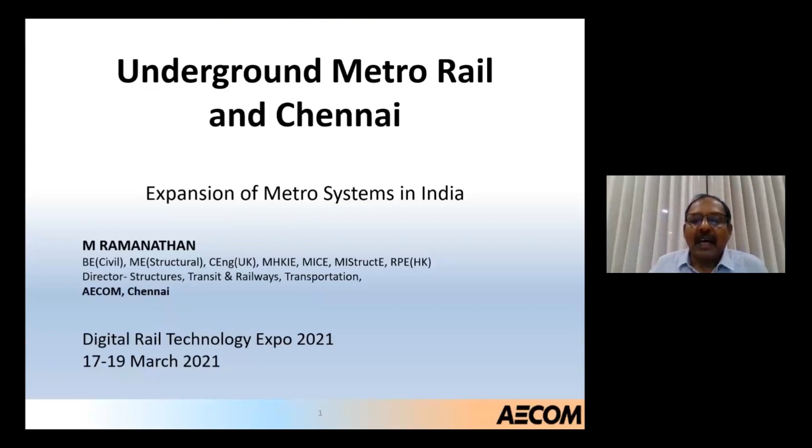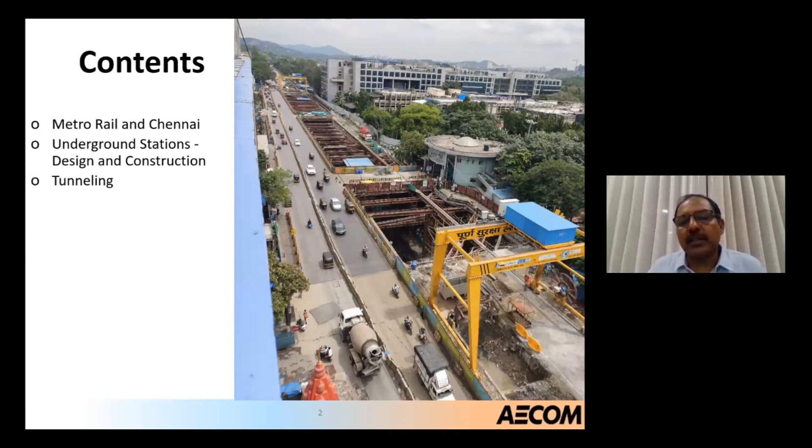So I have divided today's presentation into 3 parts. The first part is about metro rail in general and the city of Chennai and its metro rail. The second part is underground stations, why we should go for underground and what are the merits and demerits. And the third part is tunnels. In underground metros, there are stations at regular distances of 1 kilometer or so, and they are connected by tunnels. So we'll talk something about tunnels as well. And the first part is metro rail and Chennai.

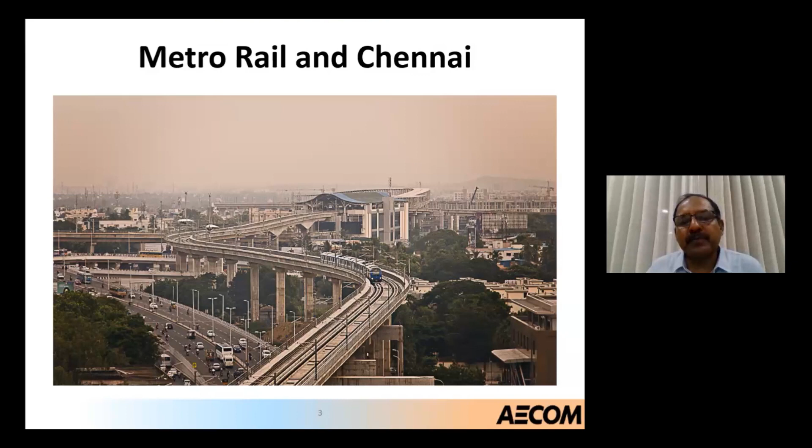Basically, let us go through how metro rail is different from the normal intercity railways, because we have been using the intercity or mainstream railways for very long. But these metros have picked up only in the last 15 to 20 years in this country. So let us just brush up on the basic differences. The metro rail, by name it's clear, runs only in the metro cities, and it's used for mass transit. In Chennai, there are 4-car trains, as you see in this picture.

A 4-car train is capable of transporting 1,276 commuters at a point of time, whereas a bus in this city can take about 70 people, 40 seated and 30 standing. So you can imagine how many buses we would need to replace a single 4-car metro train. So it is used for mass transit. Another thing is the stations are located very close, normally 1 kilometer apart. The idea is anyone along the alignment in the city, by walking not more than 500 meters, should be in a good position to board a train.

That is the idea. And in metro, we use standard gauge. What is the standard gauge? Indian Railways were originally running on meter gauge; as the name indicates, the distance between the two rails is 1 meter, and it is all replaced by broad gauge now, which is more than 1.5 meters. The standard gauge is something between meter gauge and broad gauge. To be precise, it is 1435 millimeters.

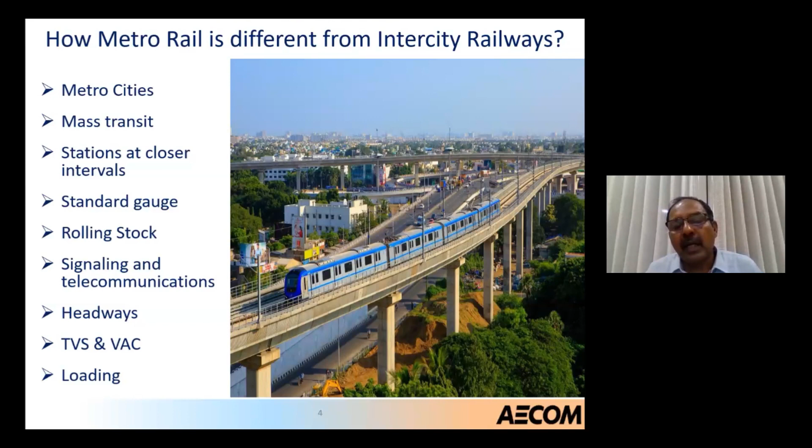And another one is this TVS. What is TVS? Tunnel ventilation system and ventilation and air conditioning system. That is all new and specific for metro rail operations. And the loading of the metro rail trains on the rails is also much different when compared to the broad gauge mainstream railway.

Now, the merits of metro rail. We all generally know that it consumes very less energy, and it is more reliable. There will not be any traffic jams, so it will be punctual, with lesser noise level, and it is very comfortable. Travel in air-conditioned coaches, so the commuter or the passenger will not be subjected to heat and other inconvenience, so that he can go to his workplace in a very good mood.

And the capacity can be augmented. For example, as you see in this picture, this is taken from the Chennai Metro, which comprises 4 cars, but it has been designed for 6 cars. The stations and signaling, telecommunication are all designed for 6 cars. Because these are all designed for a long period, 120 years of design life, it can be augmented to 6 cars whenever it is required. And the journey time is reduced, it's faster, carbon emission is less, and it carries the same traffic as 7 lanes of buses and 22 lanes of private cars. So there's a lot of merits in going for metro rail.

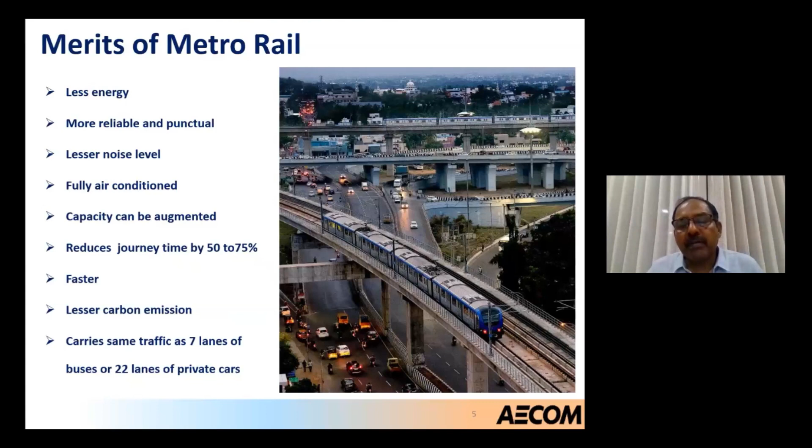So now coming to India. All over the world, metro rail has been very popular, but if you consider India, it all started very late. But actually, the Calcutta Metro started very early, as early as 1972. But the method of construction used was not very modern. It was an underground metro. Nowadays, we have what we call bore tunnels. The tunnels can be bored underground without disturbing the strata above ground. That type of technology had not developed or was not well disseminated.

So the Calcutta Metro used the conventional method, what is called cut and cover. That means you cut open the earth. Now the stations are constructed that way, but tunnels are bored. In Calcutta Metro, they constructed both tunnels and stations by this cut and cover method. And in those days, the communication, the interface between various government agencies and utility companies, was not very good, and all that delayed the Calcutta Metro, and people were subject to a lot of inconvenience. In 1984, after a solid 12 years, they could inaugurate only 3.5 kilometers of underground metro. So the experience of Calcutta Metro made other cities not venture into metro rail.

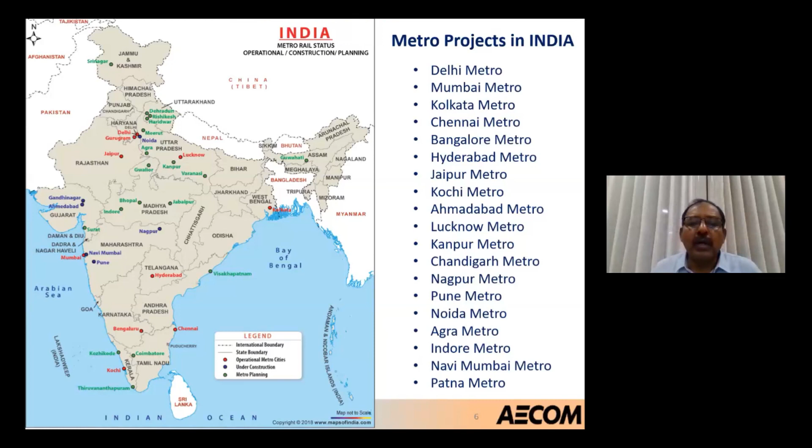So in many second-tier cities, Kochi, Jaipur, Ahmedabad, Lucknow, Kanpur, Chandigarh, Nagpur, Pune, Noida, Agra, Indore, Patna, metro rail constructions are now going on. So the metro system has well taken off in our country. So this is a map of Chennai Metro.

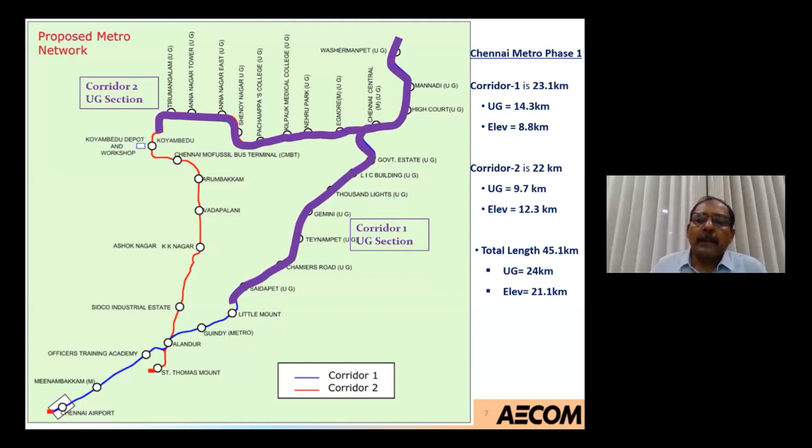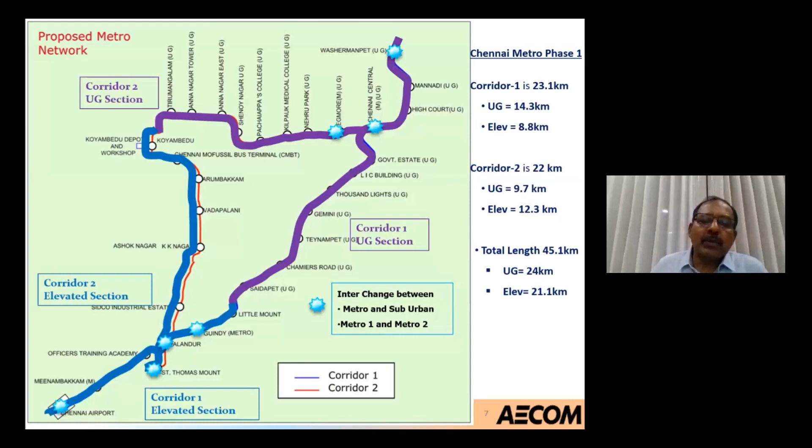I'm going into the details. This is the first phase, which commenced in 2009 and completed in 2016, but in between it's done in phases. This totals 45 kilometers, out of which nearly 50% is underground, shown in the shaded purple color, and the blue color is elevated. So there are two corridors.

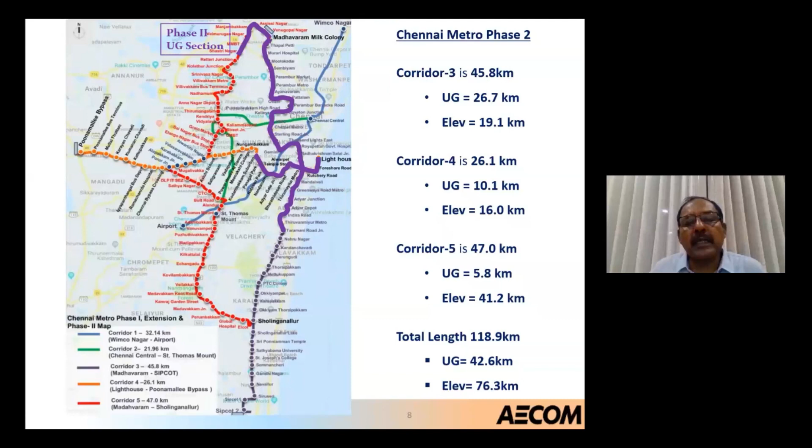So what has been shown in the purple thick color highlighted, one is underground, and the remaining part is... so these are the different stages.

The detailed project report for phase 2 was completed in 2015. The geotechnical investigation, which the client themselves did, was a very expansive geotechnical investigation completed in 2018. The detailed design consultant, AECOM, is doing the entire corridor 3, while other consultants are doing corridor 4 and corridor 5. AECOM is also doing part of corridor 4. These are the detailed design consultants. They were appointed in 2018, and detailed design work was completed in 2019.

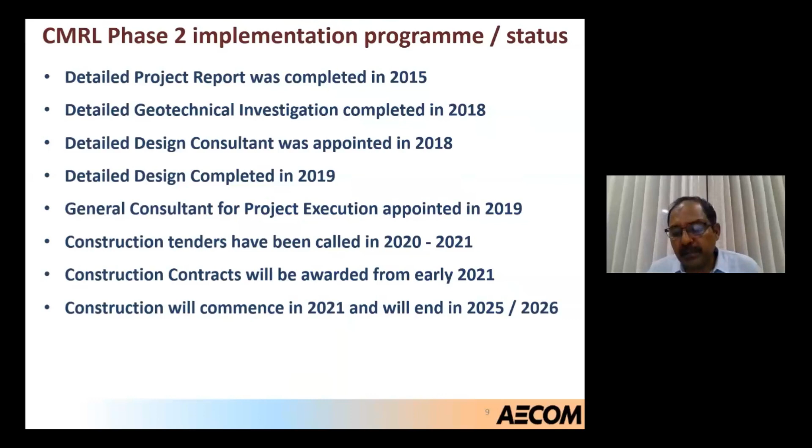A general consultant for project execution, that is construction supervision and contract management, was appointed in 2019. Tenders are floated in 2020 and 2021, and construction contracts will be awarded starting from 2021, with works completed in phases between 2025 and 2026.

Before going to the underground, I want to show a 3D view of an elevated metro along OMR. What is OMR? It is Old Mahabalipuram Road, the road from the city which leads to the historical place called Mahabalipuram, where Prime Minister Modi and Chinese President Xi Jinping met 2 years ago. So this is that road, a famous road of the city called Old Mahabalipuram Road. You can see there is a viaduct below.

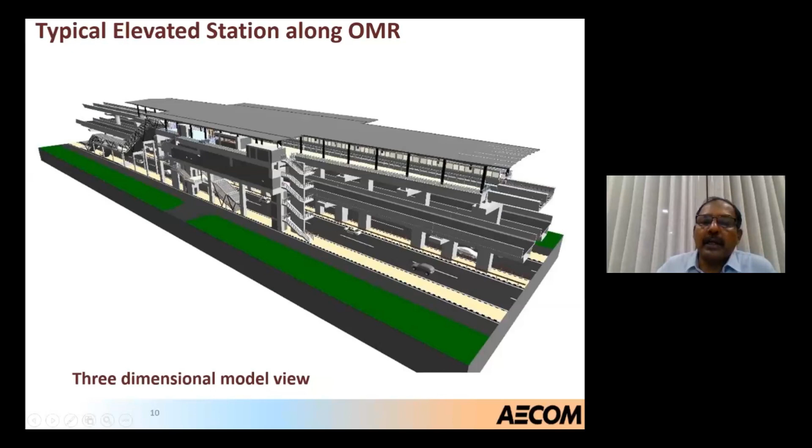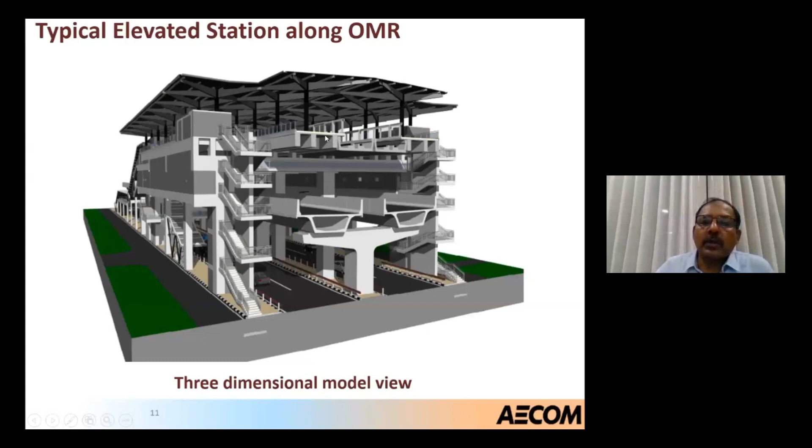This is a proposed elevated road, and the metro rail train will be running above. So this is another cross section, a closer view. This is the existing Old Mahabalipuram Road, now called Rajiv Gandhi Road, and this is the proposed elevated viaduct, and this is the station side platform. The platforms will be opposite to each other.

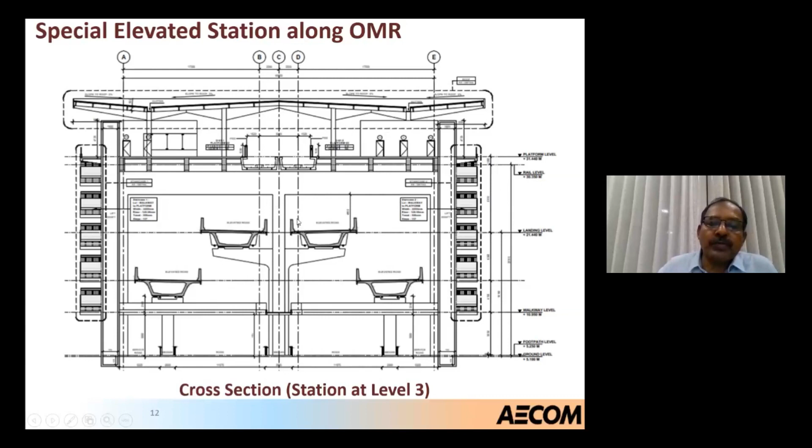And here is another place where there will be 2 decks of elevated viaducts: one elevated road and another at a junction where there is going to be a flyover, over which the stations are constructed. So all provisions - the station will go first, but provisions will be made for the elevated road, which will come later.

And now I go into the underground stations. So this is a typical underground station, where you can see it's a big box, constructed below ground with tunnels on either side.

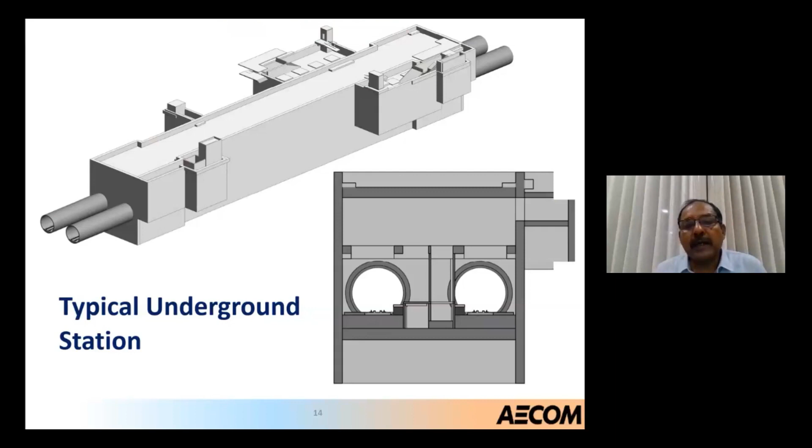Underground metros are there everywhere, all over the world. The London Metro, popularly known as the Tube, is the first one, which started in 1863, and now it has more than 400 kilometers of metro with nearly 270 stations, and on average 40 lakh journeys are performed every day. Paris Metro followed in 1900, New York Metro also in 1904. The US is not very popular for public transport, but the city of New York has this, what is called a subway, which is very popular. It has the maximum number of stations, nearly 472 stations in New York.

And Tokyo Metro came in 1927. Moscow, actually it is a piece of - what I would say - every station has been constructed so meticulously, like a museum, and with a lot of heritage value.

Because of this communist policy and Iron Curtain, many people did not know about the developments in Moscow for a long time. So anybody who has an opportunity should visit Moscow Metro.

Beijing Metro started in 1969, and all over the world, Beijing has the maximum number of people using metro, nearly 1 crore journeys per day. Hong Kong Metro, where I was trained, started operation in 1980, Singapore in 1987. Shanghai Metro, though it started very late in 1993, today has the maximum length of metro rail all over the world, nearly 644 kilometers.

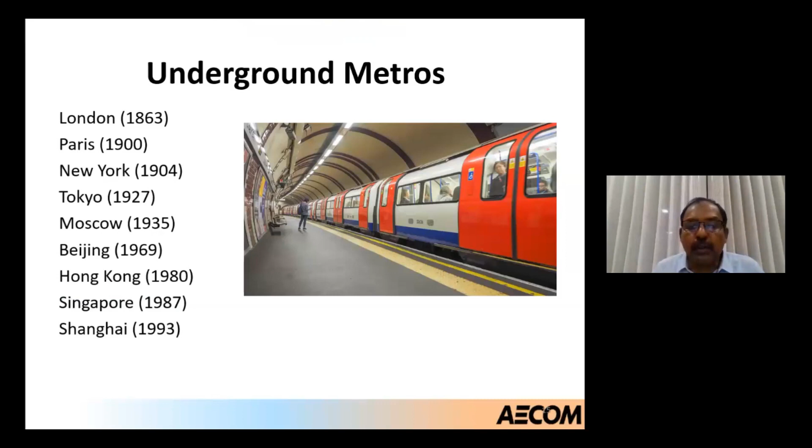Now, all over the world, people use underground metro. Why should they go for underground? As I said before, in India, most of the second tier cities and even the first tier cities go for elevated, for economical reasons. The cost is less, and the inconvenience to city citizens or city dwellers at the time of construction is relatively less in elevated metro. Underground is a bit of a nuisance during construction, it is expensive, and it takes longer time. So that is why our people are mostly going for elevated.

But why do all the major cities all over the world go for underground? Because underground metro is more sustainable. It does not damage the configuration and landscape of the city. I can compare the Mount Road of Madras, or Chennai, and the MG Road of Bangalore. MG Road of Bangalore has an elevated metro, meaning the landscape of the city has totally changed. You have an eyesore sort of viaduct in the middle of a very important road of the city. Whereas in the Anna Salai or Mount Road of Chennai city, which is the lifeline of the city, all the metro stations are below ground, underground.

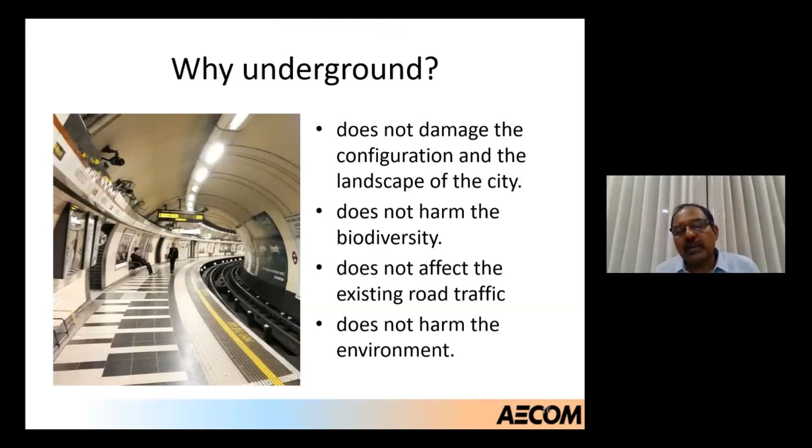It does not harm the biodiversity, and the existing road traffic is not affected, because in elevated metro you build a pier in the middle and the road width is reduced. Whereas underground, whatever traffic we push below the road, otherwise they would have been traveling in buses, cars, or scooters above the road—so all their carbon emission is now saved. So they are going below ground, it is not harming the environment. These are the broad advantages of underground.

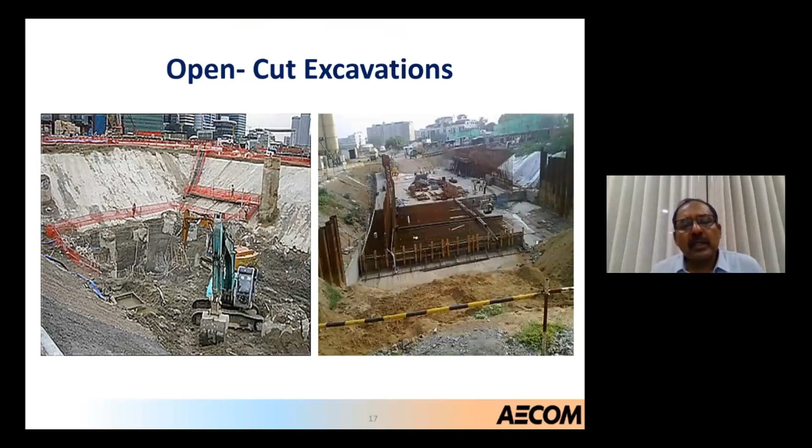Now I quickly go into the construction techniques. Underground, if the soil is good, you can go for open excavation, but not in many places. In places where the soil is loose, you have to use some shoring system or other system. A shoring system is a temporary vertical support to support the excavation. In places like Delhi, in the top portion you don't need any shoring, but below you need it. Mumbai is the same. In places like the Middle East, where the soil is good, you can just go down 25, 30 meters without any problem.

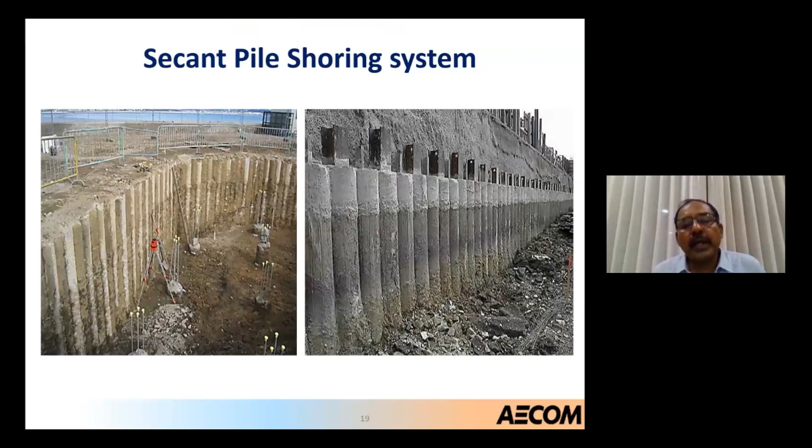But Chennai city is not very advantageous in that way, so we use something called a diaphragm wall, because the water table is very high. It is not economical to use a temporary shoring system. It can be used, but instead, what is used is a diaphragm wall—a concrete wall constructed like a bore pile, by pouring concrete from the top. It is used as temporary support during the construction stage, where you see a lot of steel struts longitudinally and in the transverse direction. But once these are all removed, this diaphragm wall, which was built for temporary use, becomes a permanent support.

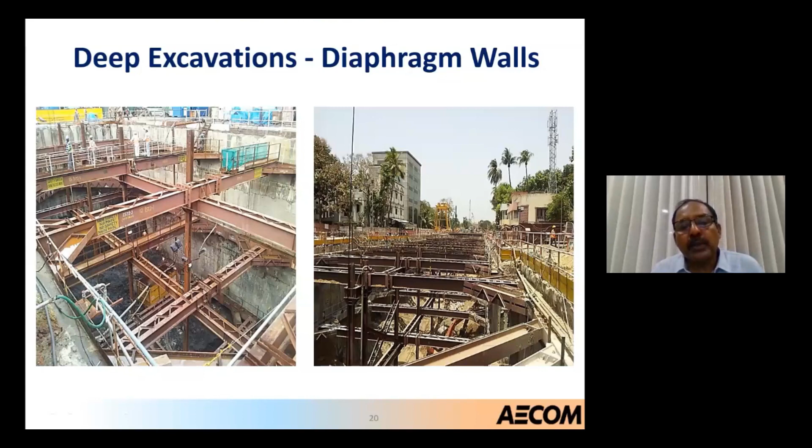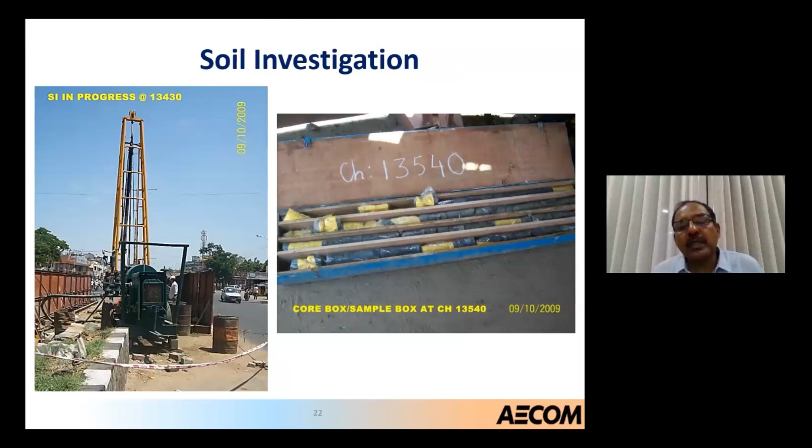This is another view of the diaphragm wall, where you can see the steel struts. We have to do an extensive soil investigation to understand the soil conditions—go 30 meters, 40 meters below ground, take samples, and geologically design your diaphragm wall and the bore tunnels. That is a very important part of underground construction.

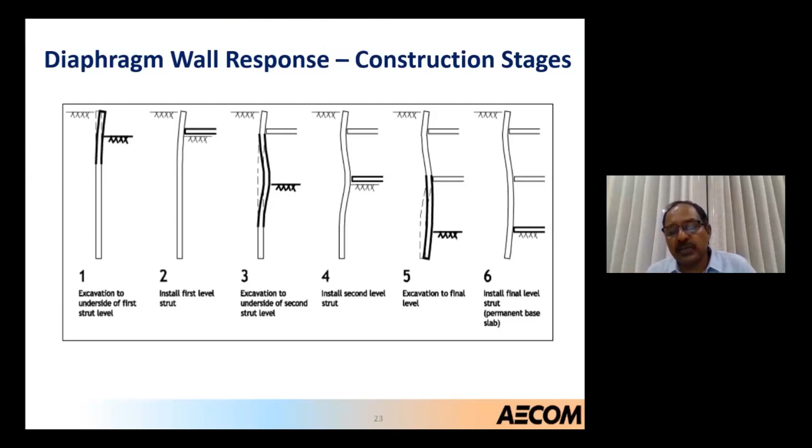As you can see, the performance of this wall at every single stage is not the same, meaning the designer has a big problem. There is no single condition. If you construct a simple building, with walls and slabs and beams, you know the maximum shear force and the maximum bending moment - there is only one case, the maximum load case. But that is not the case with a diaphragm wall or retaining wall, especially in deep underground structures. At every single stage the performance is different, so you have to check every single stage and design such that it withstands all pressures at all stages.

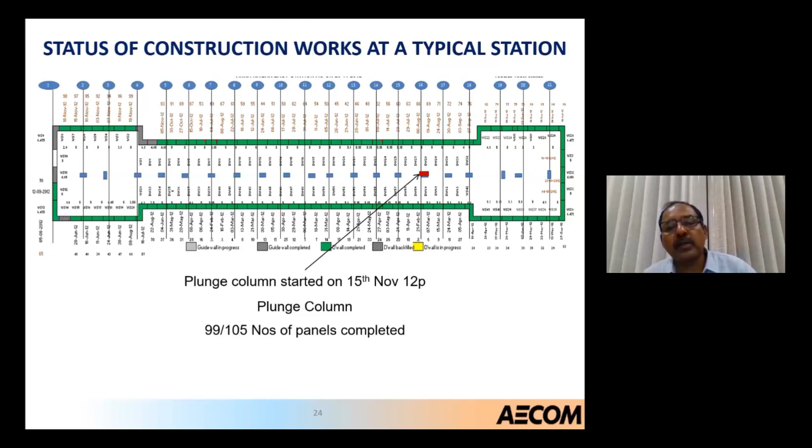This is a plan taken from one of the metro stations in the city of Chennai. What is shown in green color is the diaphragm wall, and what is shown in blue color is a column in between. This is a plan view.

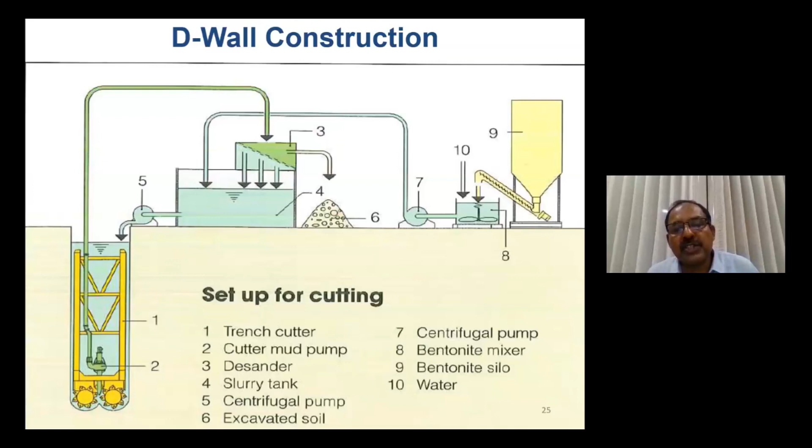This is how the D wall is constructed by diaphragm wall, shown in 1 and 2. I've taken this from a brochure of a trench cutter manufacturer. The trench is cut, and a temporary solution called bentonite is filled in, which holds the excavation temporarily while you insert the rebars or reinforcement and also the concrete. This is a very elaborate process, and not many contractors can do it - you need a lot of equipment and specialization to do this diaphragm wall.

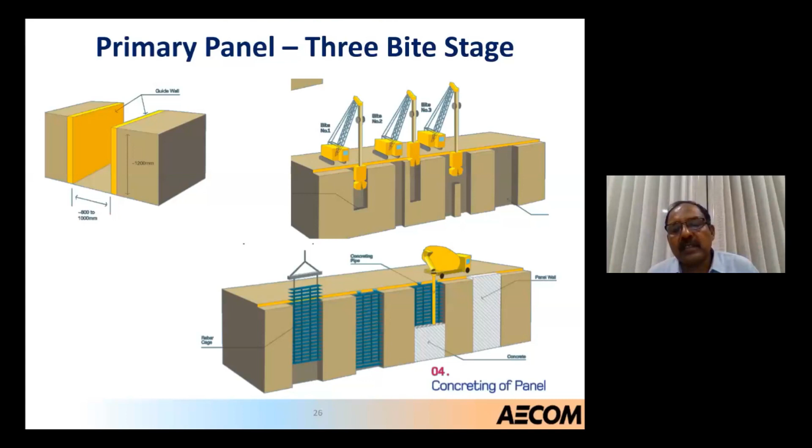These are some more cartoons showing how it's done. It is all cut into small pieces. The first one shows a guide wall, and the second shows it cut in 3 bites, with reinforcement after the 3 bites. You hold for the entire thing, normally about 1.5 to 1.8 meters, and the rebar reinforcement is inserted, and concrete is poured.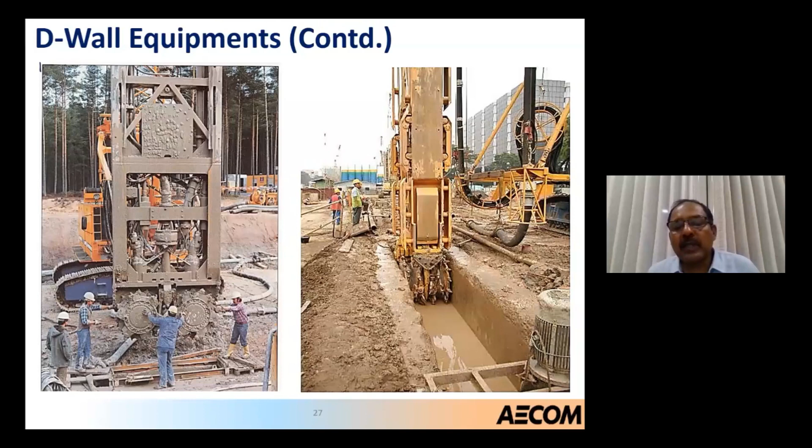So these are the pictures. On the left side is the trench cutter, and on the right side is what I talked about, the guide wall. It's going down, and this is a reinforcement cage of a diaphragm wall. What you see, the planks at 3 levels, is for the 3 stages, 3 slabs - the top slab and the concourse slab where commuters come and buy tickets, and then down to the platform level where the trains are. At all these 3 levels, you have to put the rebars to the couplers for the rebars of the slabs to connect.

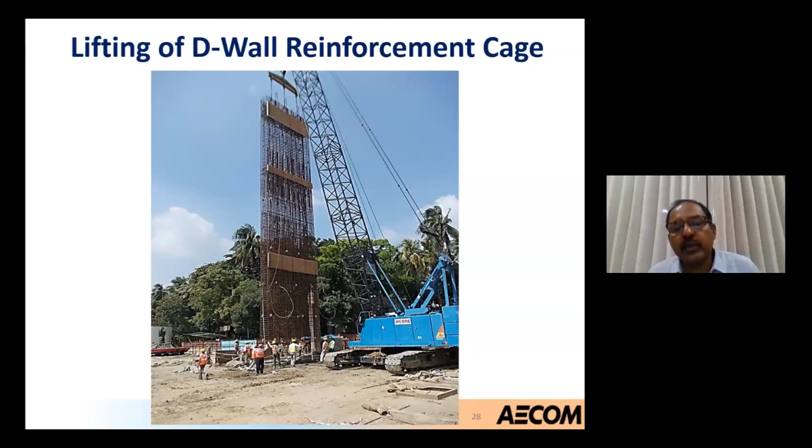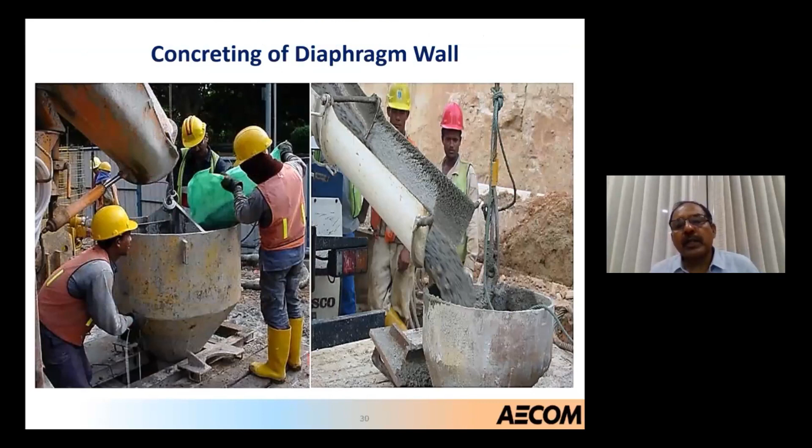This is a close-up view. The reinforcement is pushed in, and this is concreting. This is how a diaphragm wall is constructed, and this photo was taken during construction of the Chennai Central Station, a 4-level station, a very complicated station.

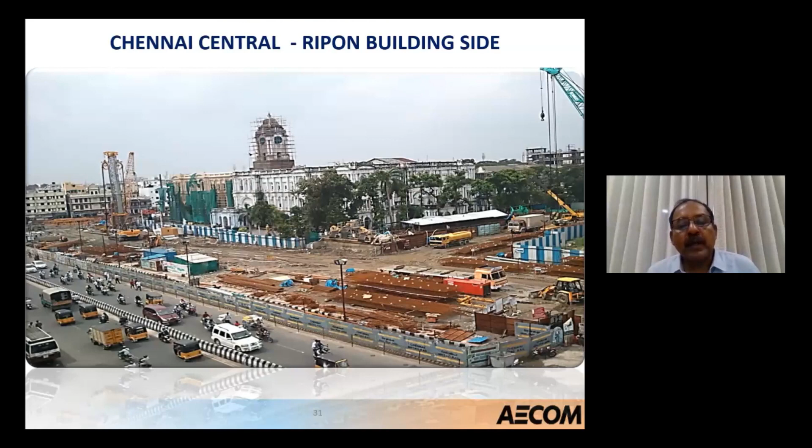I was talking about the heritage building. What you see on the right-hand side in white color is the Ripon building, more than 100 years old. Some renovation work was also going on at the same time. You can see all the reinforcement bars left out, and the traffic has been diverted - part of the road has been taken by the contractor for construction, while the remaining part continues with traffic. This is what I call the disturbance or nuisance to the public during construction. There's a lot of utilities to be diverted, a lot of traffic to be diverted. But once you construct it, the station will go below ground and it will last for 120 years.

This is another underground station, also from Chennai. I don't want to go into the details, but this is what you call top-down construction. The diaphragm wall, and then the struts - you can see the reinforcement. The slab will be cast first, the top slab, and then excavation will go further down.

So first slab will be cast first, second slab next, and the third slab later. It is called top-down. There is also another method called bottom-up: we excavate everything down and build from the bottom.

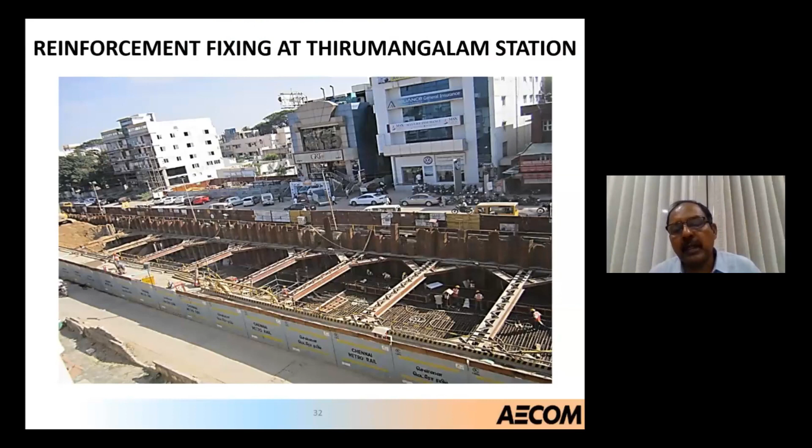So very quickly, I'll go through the bore tunnels. The bore tunnels are tunnels which are connecting the two stations. So normally, these twin tunnels are 14 meters apart and average 6-meter diameter. To be precise, it may be 5.8 or 5.7, something like that. It was a big thing when it started in 2000, but now after 20 years, Indian contractors and Indian engineers are very familiar with bore tunnels.

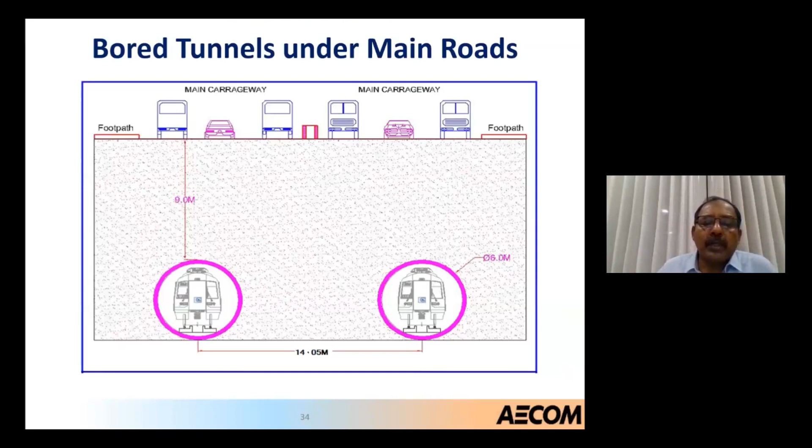It is normally 1.5 times the diameter, that's 9 meter, 6 times 1.5 below ground. But if situation warrants, it can also be above, but you have to treat the ground. So this is a tunnel which is showing what we call technically space proofing. That is, everything will fit into it, and the train should not touch the kinematic envelope what you see all around, and all the cables, ducts, drainage, rail support things, platforms, everything will be accommodated within this 5.8 meter or 6-meter diameter tunnel.

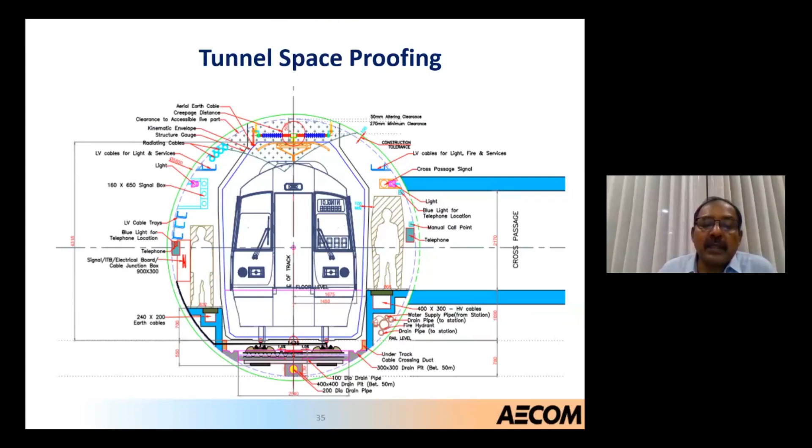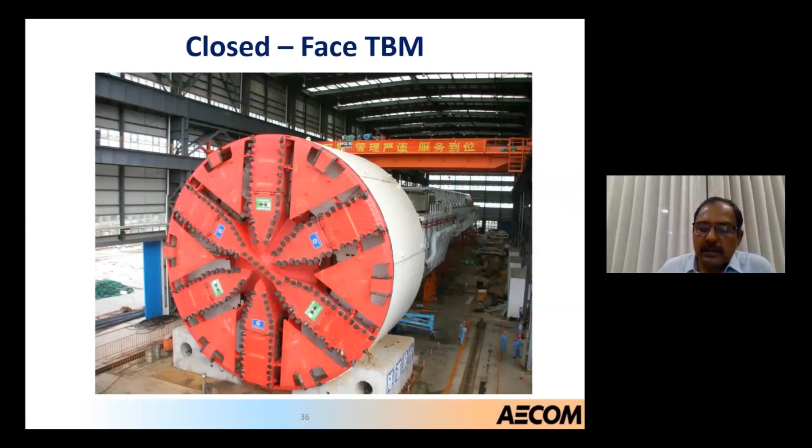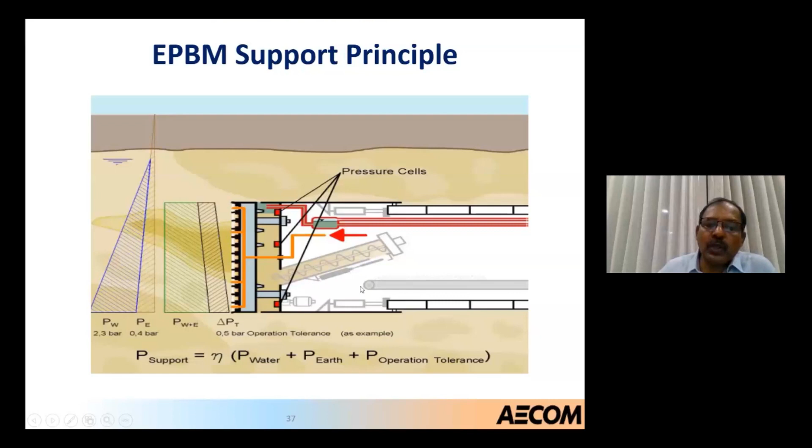So all this is acting towards that, and the machine from inside will be giving an equal and opposite pressure to withstand all this big pressure. And it rolls around, and the soil will be excavated and taken through the screw conveyor and back to the tail of the tunnel boring machine. So this is a more clear cross section. So this is the front face. This is the screw conveyor taking the soil or the earth out, and that will be first stored here in this chamber and then taken inside.

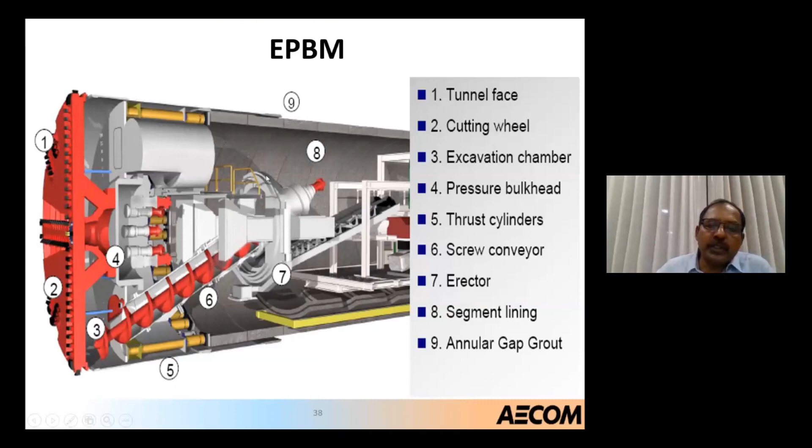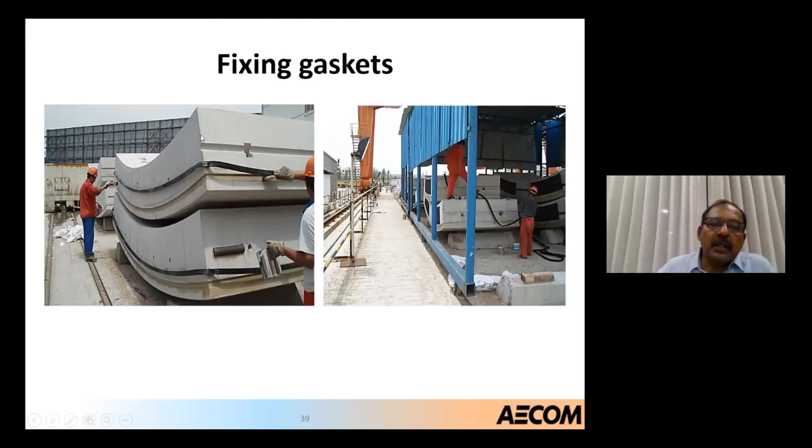And these are the segment linings. So what you see here is the concrete segments. The entire circle is divided into normally 6 pieces, and different sizes of segments will be there. That will all be brought and then fixed in position. So the machine will do everything. And this is a gasket for all these joints to be connected. So you can see the finish of this tunnel, the tunnel segments.

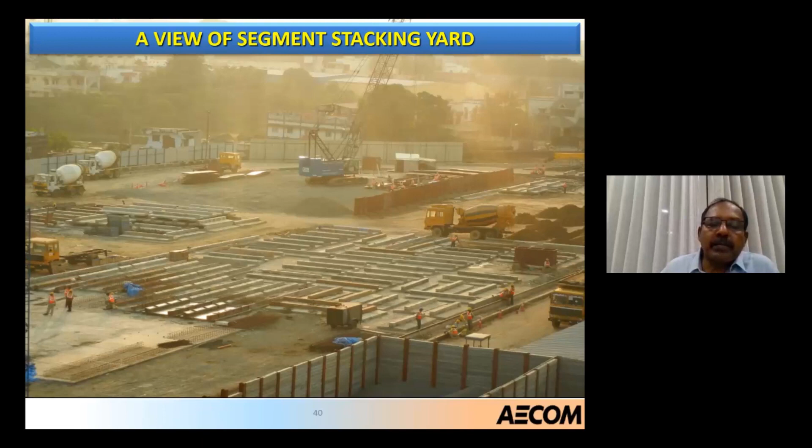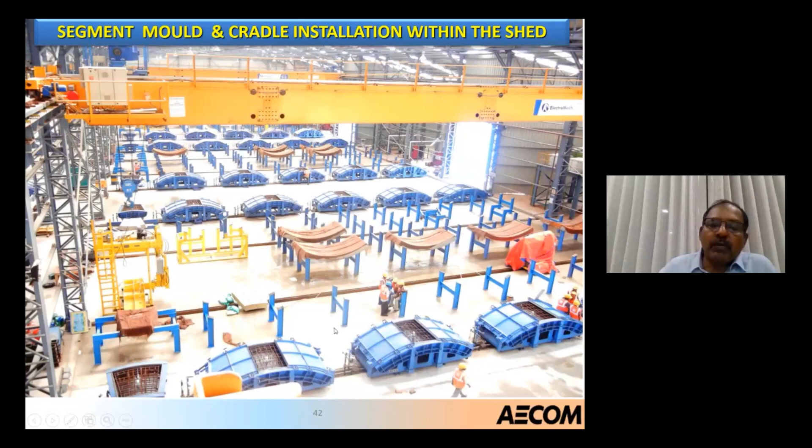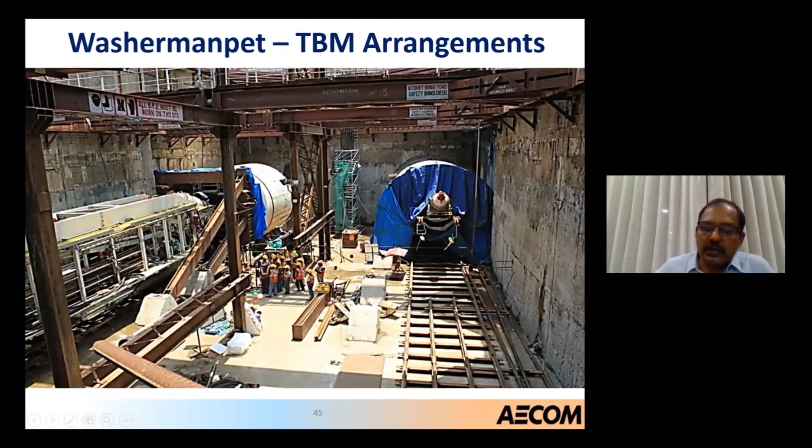And this is a station. So this is the tunnel boring machine. From here, it will start working. It pierces through the wall and then goes out of the station box. And this is a photo. From one station it will start, and at another station it will break and come in. And again, it will start from the next station to the following station. So the tunnel boring exercise, India has very well practiced, and now a lot of Indian contractors and Indian engineers are also very familiar. It has been in operation for nearly 20 years in this country.

So the underground metro, we have come to the end of the presentation. There is a lot of inconvenience during construction, but when compared to elevated metro, it is more sustainable, and India has very well taken off, and a lot of cities have already started working on metro, but most of them are elevated. And I wish a day will come that, in future metros, more underground will be built. Wherever the city has not developed, the suburban areas where you have a lot of land, like the picture of OMR in Chennai city, a very wide 40-meter road, there you can go for elevated metro. But wherever the streets are narrow, wherever it has heritage value, wherever you don't want to touch the configuration of the road traffic, it's always better to go for underground metro.